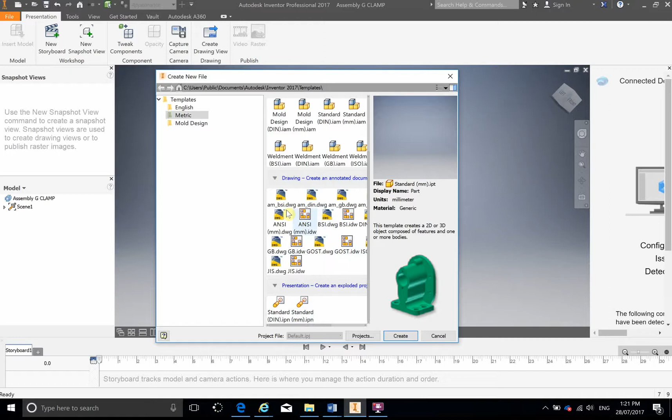All I've done is I've gone to File and I've come down here to Standard MM, and it's an IPN drawing, and that's going to allow me to open up a file like this, and then you'll go into, I think it was under File, and you place in your item, or it might prompt you when you open it up. Can't quite remember, but it's simple as.

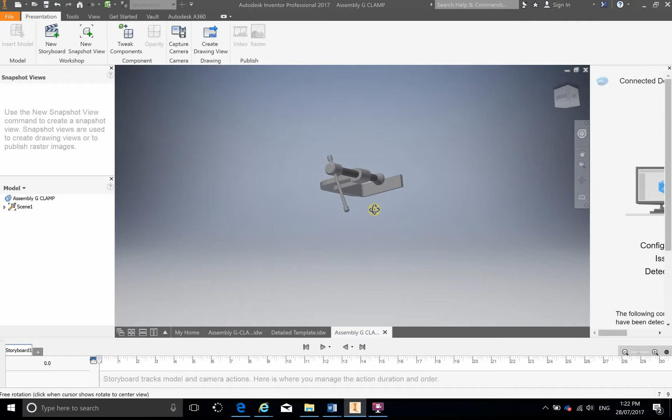What I need to do first is arrange this so that I can start pulling it apart and showing it ready for the exploded view. One problem I have encountered is that the spindle and the handle aren't aligned very well. So what I'm going to do is select these items, and if I hold down Shift, or I cast a web on them, like a lasso, I can select items and manipulate just the ones that

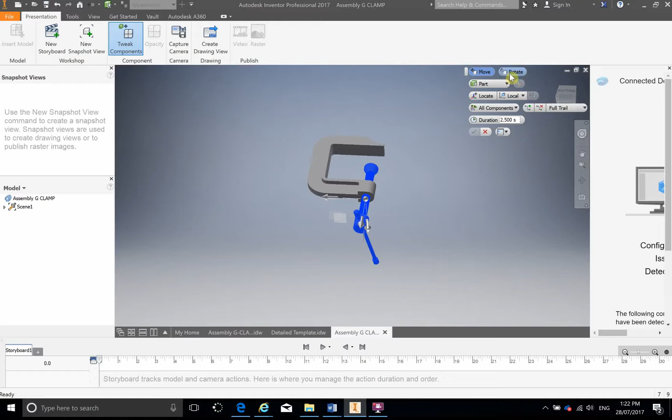are highlighted blue. So I'm going to go to Tweak, and I'm going to go to Rotate, and if I click on my view, what I'm going to try and do is grab this, rotate it around so that it lines up now, and then I click on the green tick.

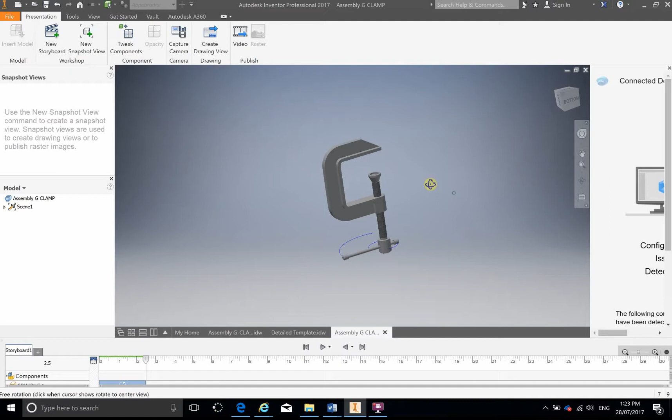From there, what I want to do is get myself a nice view of the item. You can use Shift and the mouse wheel if you like, and a nice view of the item for how I'm going to start pulling it apart. And so you need to take into consideration the spindle's going to go back and the handle's going to go out like that. So what I might even do is spin it around, just tilt it like that.

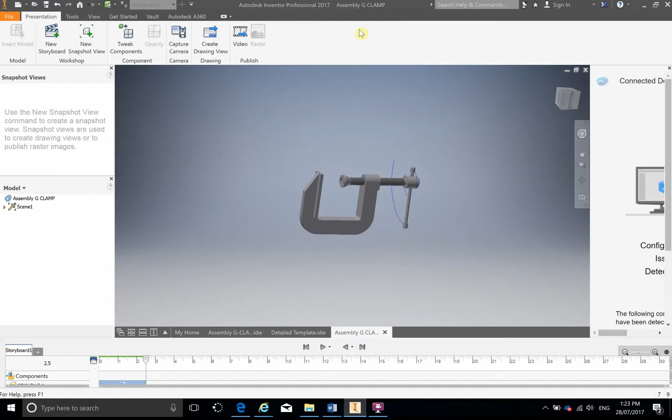Okay, so what I can do now is I can select the spindle and the handle caps. I'm going to go to Tweak Component, and if I select one of these axes, so the X, Y, and Z, if I select that axis, I can tell it to move back. So if I said go back 50 mil, not quite enough, I might try for 80, and then I just click on the green tick.

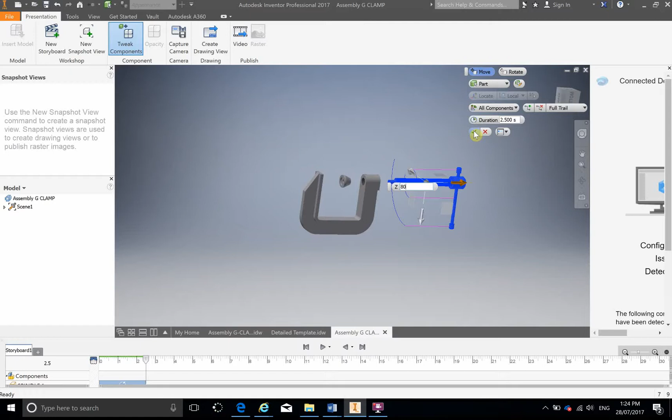What I've done is I've left the spindle there, showing that when it comes together, the spindle cap needs to be inserted from this side. Then I've got my spindle. I'm now going to show how the handle pulls apart. I'm going to leave that cap where it is, and I'm just going to select these two items. So they're blue, this is still grey.

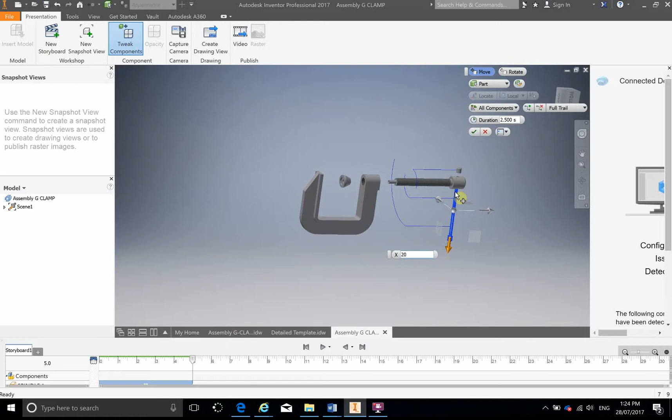Tweak Component, select the axes in which I want the component to go, and if I was to go, just as a guess, 40 mil, that's looking pretty good. Here's an example of what wouldn't be looking very good if I was to say 20 mil. So I've pulled it out, but I haven't shown the end of this handle coming out of the part. So that's why I recommend you pull the handle out a little bit more so you can see a clear

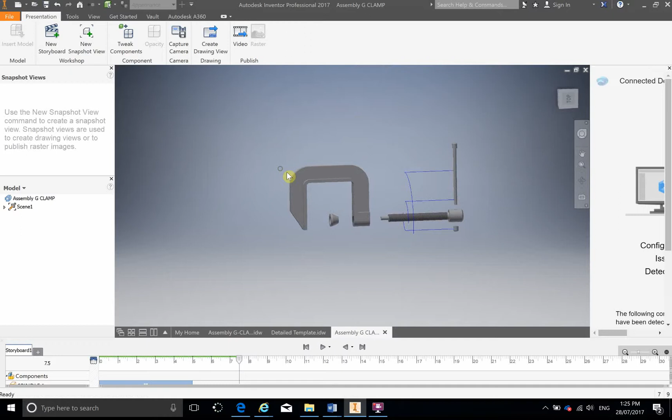gap there. I then click on my little green tick, and I've pretty much created my exploded view, which would be pretty simple for anyone to view and get a grasp of how this tool gets assembled.

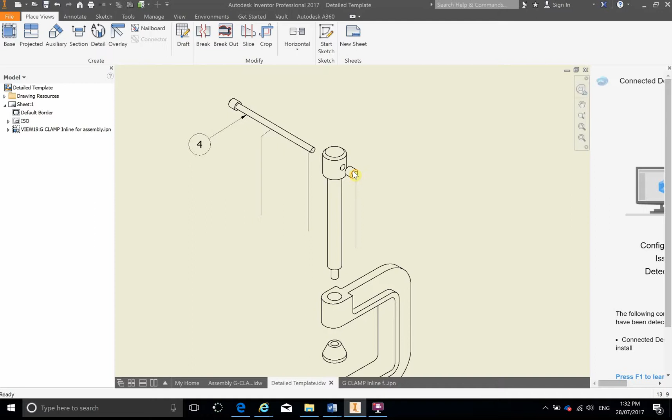From here, guys, you can save this drawing and then open up another template, and you can place it as a base view, get it into the right orientation that you like, that shows all the parts. This isn't too bad. The only thing I don't like about this is that our spindle is slightly shadowed by one of the handle caps. So I might tweak that a little bit later on, but it's good enough for this example.

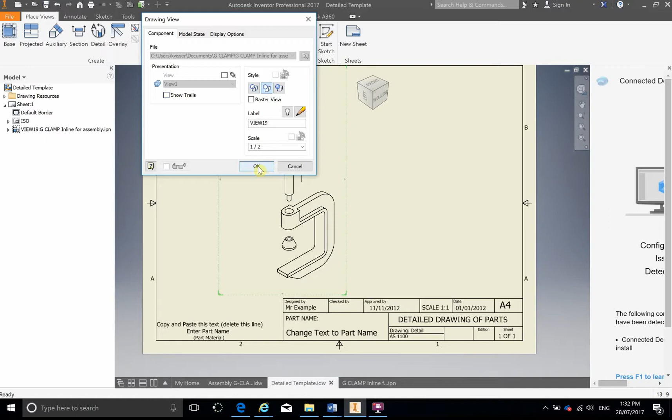Now, one thing that you will get are these lines that show the movement of the parts. I'm not the biggest fan of them unless they're directly linked into how the part goes together. So probably better we get rid of them, and it's just your trails. So if you double click, like I just did, on the item, then click on Show Trails, click OK. There's one there, so it should go away. Yep, they've gone away.

I can then go into Annotate. I can finish off putting on my balloons. So click on the part, left click, right click, continue. From there, I can import a parts list by selecting the view, click OK. Might have to modify this a little bit.

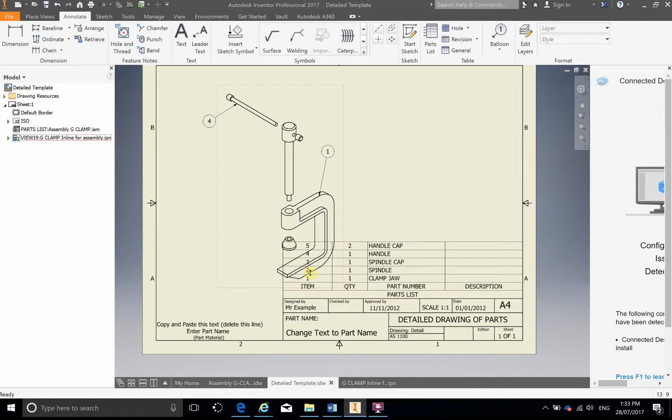I'll move some things around because I don't want the parts list there. It's copied my last settings by putting the heading down the bottom and the numbers starting at 1 on the bottom, which is good. So I should be able to move that around. And my balloons follow, which is cool. What I might even do is flip this drawing. So we'll see what happens.

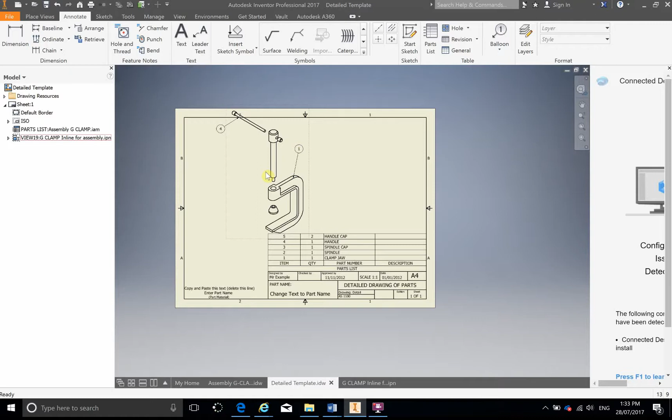I don't want to bore you with this, but basically you would set up your page so that it all fits, and you've got your title block, your parts list again, and your balloons. And to get rid of the line tracing, just double click on the drawing and change the setting there. You can also change how the drawing looks by double clicking on it, and you can change your visual style there. And that should pretty much do you for task 14 to create an exploded assembly.

Keep in mind you do need to change your title block for the appropriate scale. So we can see here I'm half scale at the moment. So you would change the scale there, and the name of the drawing would be your exploded assembly drawing.